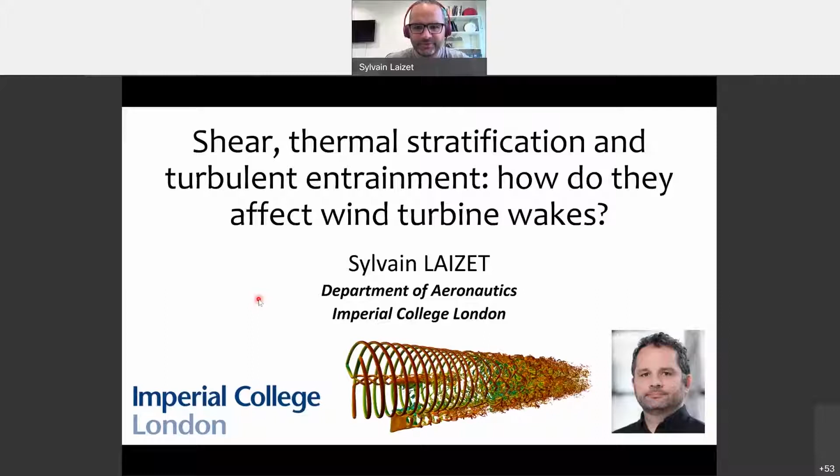I would like to thank my collaborators, Georgios Deskos from NREL, Amy Hodgkins, who is a PhD student currently working with me, and Nikos Bempedelis, who is a postdoc also working with me in the Department of Aeronautics. The results that I'm going to present today were produced by those three collaborators, so I would like to thank them deeply, and I'm very honored to present their results on their behalf.

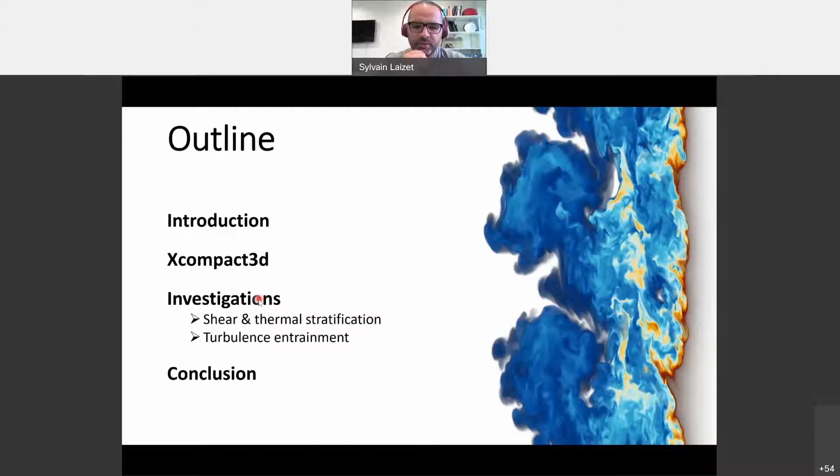So this is the outline of my presentation. I will have a small introduction - you are obviously all familiar with wind farms, so it's going to be very short. Then I will briefly introduce the wind flow solver that we are using for the simulation. And then I will focus on two aspects, shear and thermal stratification, and how they are affecting the near-field wake development of wind turbine wakes. We will also be looking at turbulence entrainment at the farm level, while the shear and thermal stratification is looking at the wake level. And then I will conclude this talk with some conclusions.

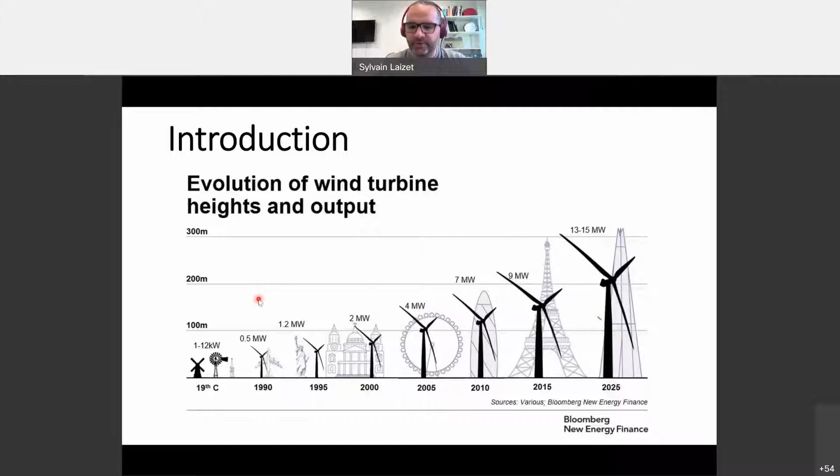There is a lot of mechanisms. There is some mixing, there is some breakdown of turbulence, there are various instabilities at stake. Due to the large size of the wind farm, we need to take into account atmospheric boundary layers, so we need to take into account shear effects, we need to take into account thermal stratification that might happen. We want to better understand the atmospheric turbulence mixing happening at the interface of the wake, the tip vortex spiral dynamics, the various instabilities that are happening, and when the wake is going to transition to turbulence. All these features have an effect on the power output of wind farms.

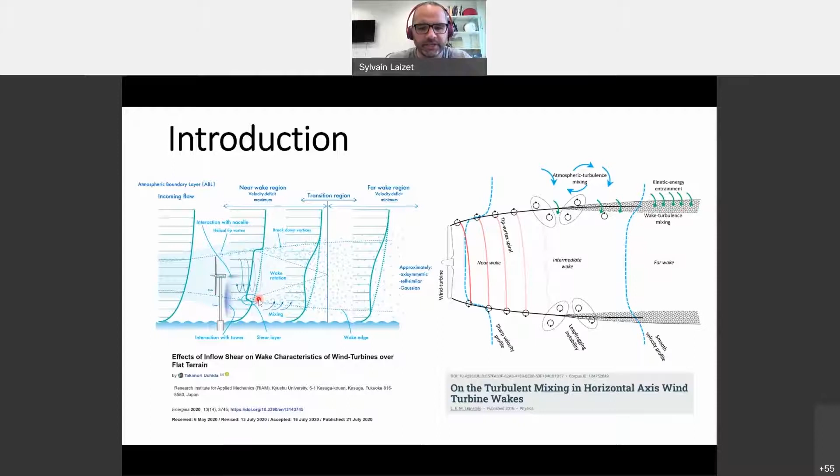So all the results that I'm going to present today have been performed with our open source wind farm simulator called XCompact3D. XCompact3D is a framework of high-order finite difference flow solvers, and as part of the XCompact3D framework, we have a wind farm simulator called WInc3D. As Flavio said in the introduction, if you're interested in using this XCompact3D framework, please register for the tutorials on Wednesday, and Flavio will be doing a demonstration on how to use XCompact3D. We have some ready-to-run simulations, so it's usually fairly straightforward to use this wind farm simulator.

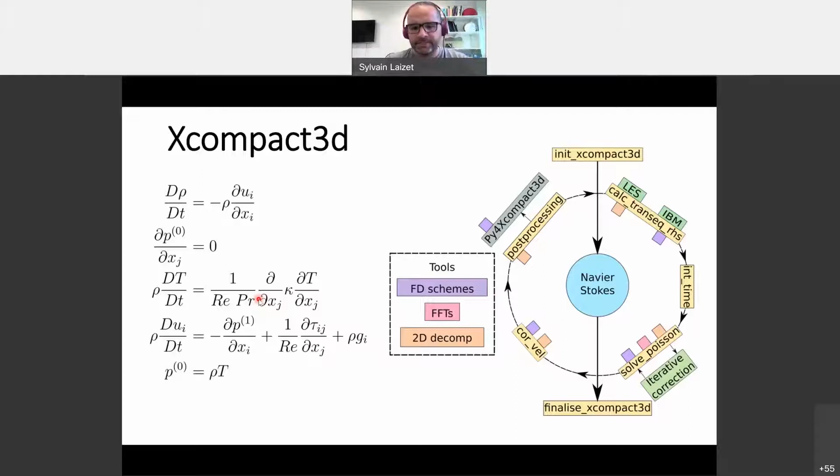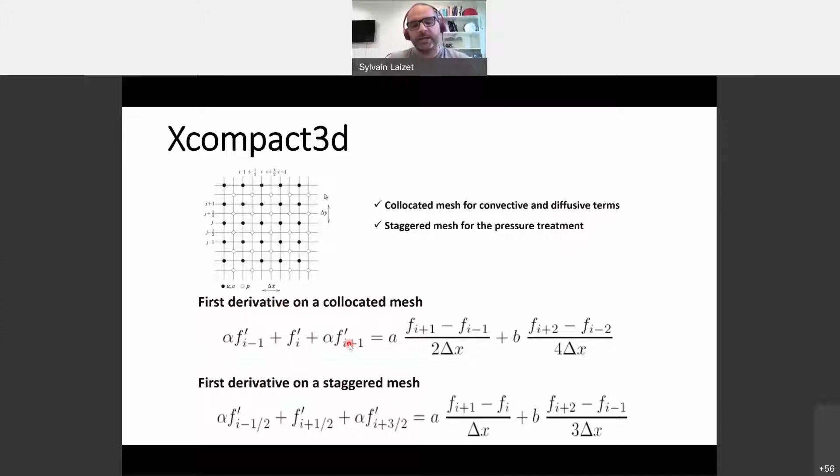In terms of equations we are solving, I'm not going to spend too much time on this - we are solving the Navier-Stokes equations. The originality of XCompact3D is that we are using a Cartesian mesh and high-order finite difference schemes. Just to give you an idea of how high-order finite difference schemes look like: the key feature here is that they are implicit in space, which means that if you want to compute the derivative at a node, you need to know the derivative at the node I-1 and I+1. The idea is that you are trying to mimic spectral methods by allowing the schemes to capture a wide range of turbulent scales.

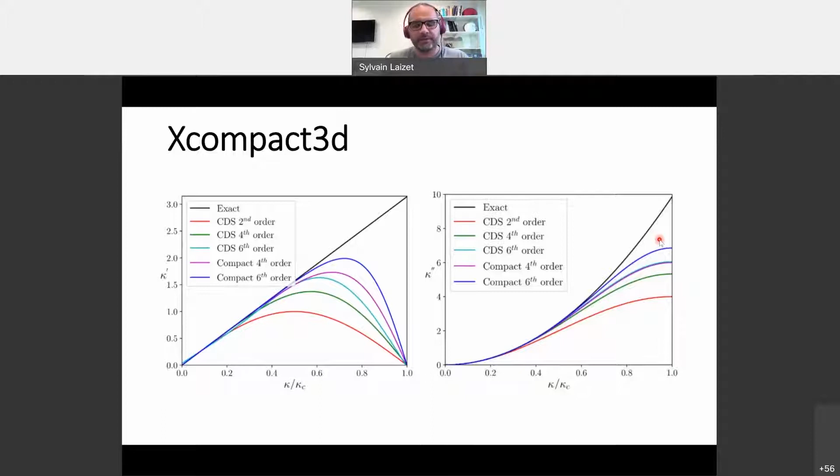The point I want to make here, and this is something now widely accepted in the community, is that high order methods are highly desirable to study turbulent flow, because at a given resolution or with a given number of degrees of freedom, you can capture more scale. So they are highly interesting with that respect.

The second important aspect of XCompact3D is that it is based on a 2D domain decomposition, which means we can efficiently use supercomputers based on CPU architecture. We are currently working on a GPU-friendly version of this XCompact3D solver, but at the moment we are only using CPUs.

All the communications, the global communication, are based on MPI all-to-all. We are doing about 70 global transpositions per time step, which means the cost of communication is between 30 and 80%. Just to give you a brief introduction to XCompact3D.

You start with a domain decomposition in X pencil. You do all your calculation in the X direction, and then you switch to the Y pencil decomposition, and you do all your calculation in the Y direction, and then you do the same thing in the Z direction, and you can switch from one domain decomposition to another.

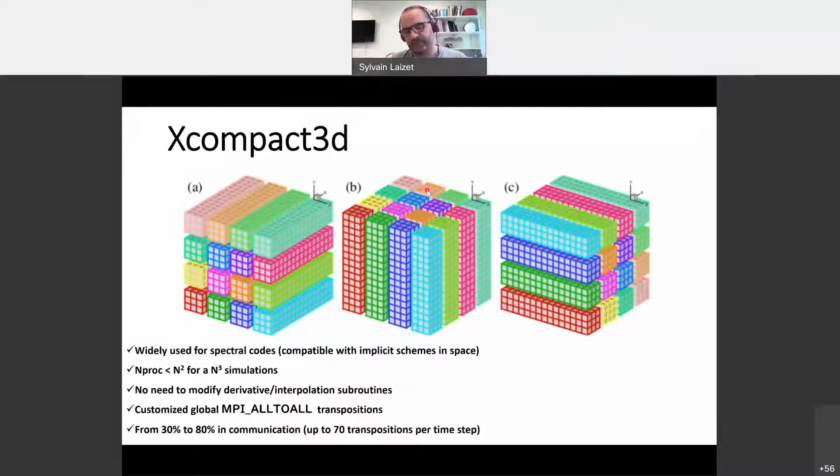This way, there is no overlap between the calculation and the communication, which means the parallel efficiency is really good. We did some benchmarking with up to 1 million cores, and you can see that if the number of mesh nodes per CPU core is large enough, typically above 50,000, then the scalability will be excellent.

If your number of mesh nodes per core is too small, then of course you will produce too many communications, and the scalability will not be that great. But once again, if you have the right balance of mesh nodes and cores, then the scalability will be excellent up to 1 million cores.

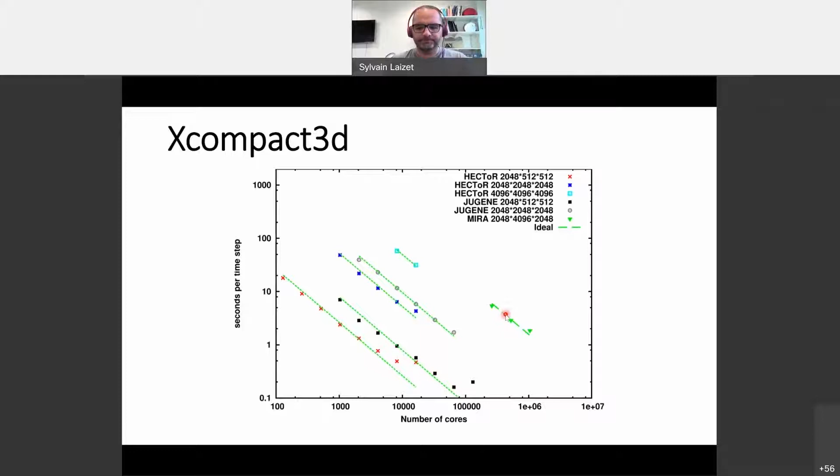Regarding simulating wind farms, we are using customized actuator line or actuator disk method. So I'm not going to spend any time on this, you are all very familiar with those techniques.

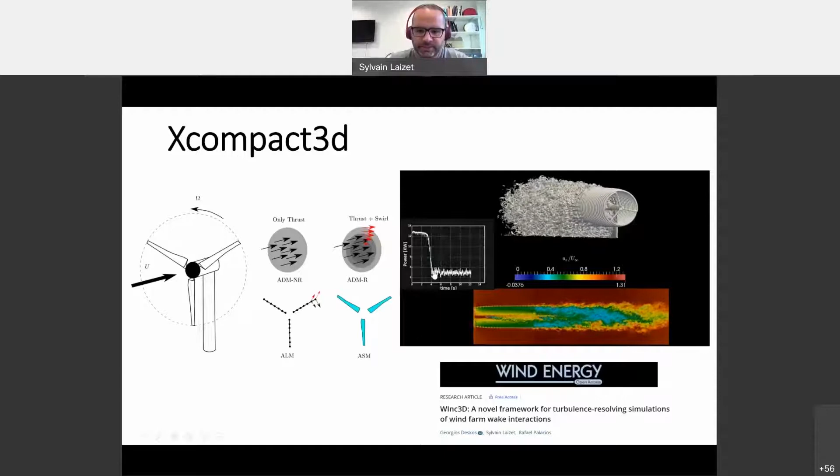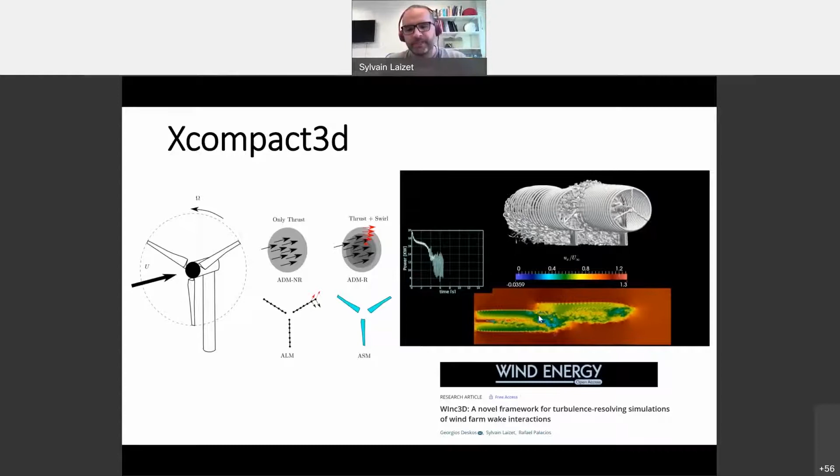Here you can see a small movie to highlight the importance of wake-to-wake interaction, where you have two wind turbines aligned. You can see there's a dramatic power reduction. Here there's a first turbine, here there's a second one. When you shift the first turbine with respect to the second one, you can see that the power output is actually not too affected.

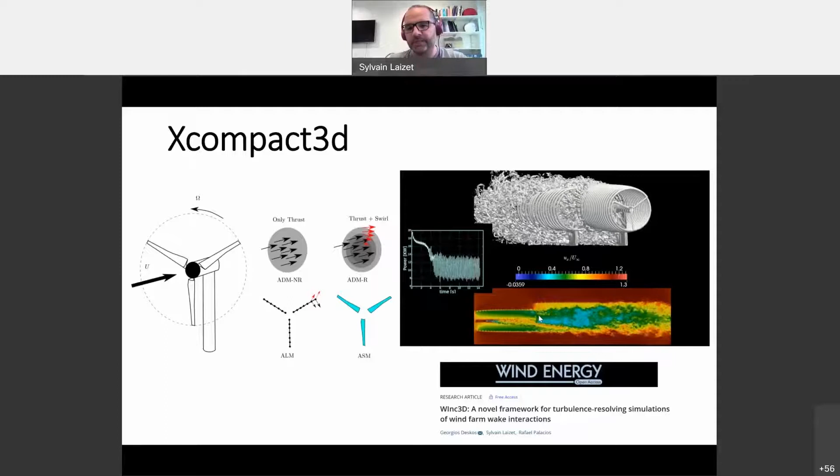This is just to highlight that XCompact3D is designed for high fidelity simulation of wind farms, and we can really try to focus on wake-to-wake interaction, and this is what I'm going to present in the following. So the first part of the results is going to focus on an idealized setup to look at the influence of shear and thermal stratification.

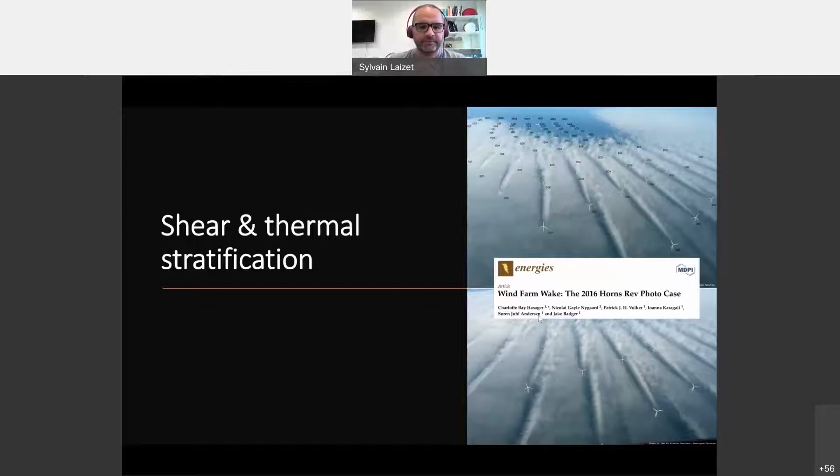So the computational domain is 10R by 10R by 10R, R being the radius of the blades. We are looking at lab scale turbines. The radius is 10.24 meters. We are using 513 cube mesh nodes. The Reynolds number is 30,000, and dx is equal to dy, dz equals 0.02 meters.

We are going to impose 3 different shear intensities in the inflow boundary condition: 0, 10, and 20%. Those values are representative of what you will get for modern large-scale wind farms in real-life applications. These are values typically encountered by large-scale turbines.

We are also looking at 3 different thermal stratifications: 0%, 1%, 2%. Once again, these values may appear small.

They are small, but this is the temperature difference you will experience in a modern wind farm, no more than 2% typically. In order to trigger turbulence, we need to impose some perturbation. Basically, if you do not impose any perturbation, because the flow solver is so accurate and conserving energy, if you start with a uniform velocity profile, then the wake will remain laminar. So it is important to add some perturbation, and we add it at the location of the turbines.

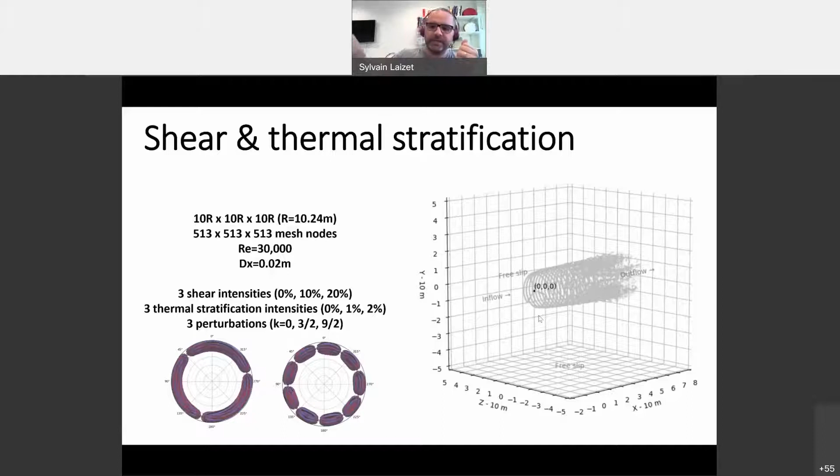I will show you more detail here. So we did the 3 by 3 by 3, we did the 27 simulations. I'm not going to present results from all 27 simulations, I'm just going to present you with a selection of results.

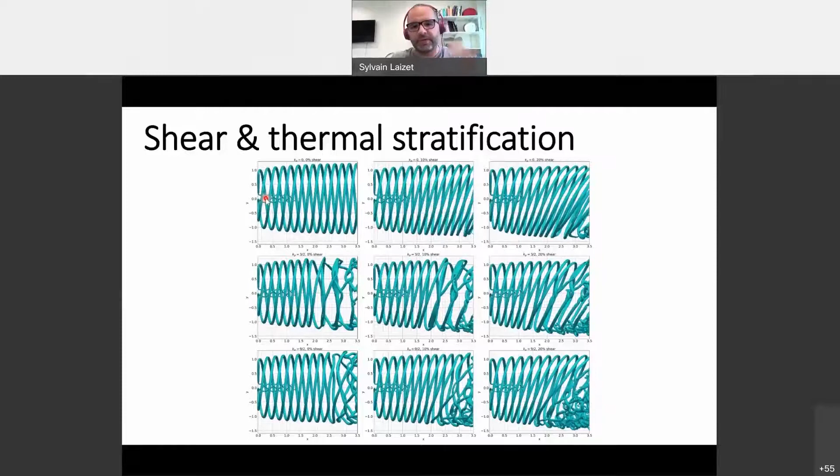But if you count the number of vortices here at the top and the number of vortices here at the bottom, they are the same. It's just that the distance between them is a bit larger. In our setup, the root vortex is not important; we have been trying to minimize the root vortex so that it does not affect our study.

So the first thing we're interested in is whether thermal stratification is going to have an effect. We know shear is certainly going to affect the breakdown to turbulence. We know that the type of perturbation and the wave number is going to have an effect as well, and this is what I'm going to discuss here.

So if we start by discussing the effect of shear and the effect of the perturbation: here we are focusing on perturbation 3/2 and 9/2, so we are discarding the zero perturbation.

We can see that 3/2 means we are going to have a pairing of vortices at 3 different locations. So you can see the imprint of the perturbation here, at the start. This is the same as this plot here, but we are plotting the vortices in a plane—a projection on the plane—so we can better see what's going on.

You can see that they start parallel, and then eventually in the transition region they start being less parallel, and then they start merging together. When we go from 3/2 to 9/2, instead of 3, we are going to have 9 different locations—1, 2, 3, 4, 5, 6, 7, 8, and 9—for the pairing. And if we look at shear, we can see that it promotes this mutual inductance instability.

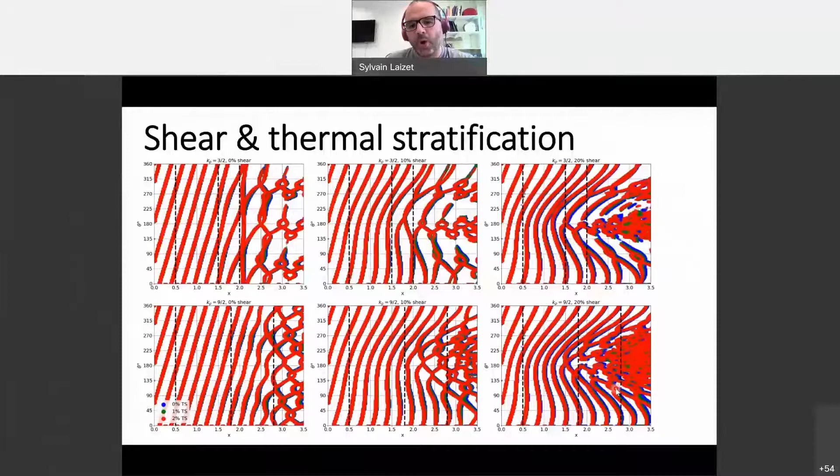So one of the first key results here is that when we are looking at the breakdown to turbulence, thermal stratification only has a very, very limited effect, while the shear is promoting the breakdown to turbulence. This is the first key message here.

We can also look at the size and the shape of the wake. So here we are looking at the 27 simulation. We are looking at the shape of the wake after 1, 2, and 3 radius, left, middle, and right, top to bottom. Top is with 0 perturbation, then 3/2 perturbation, and 9/2 perturbation at the bottom.

The key figure here is that when you have shear and thermal stratification, the wake is slightly shifted downstream. It's a little bit bigger in size, and it's mainly bigger at the bottom of the computational domain. At the top of the computational domain, there's not much change.

If we look at the area, and we are interested in the area difference with respect to the uniform case where there's no shear and no thermal stratification, you can see differences up to 16%. So when you combine shear and thermal stratification, there is a significant effect on the wake dimension.

If you only look at thermal stratification, the differences are very small—we're talking about differences of 1, 2, maybe 3%. So thermal stratification alone is not doing much. But it's very interesting to see that when you combine shear and thermal stratification, you have a dramatic effect.

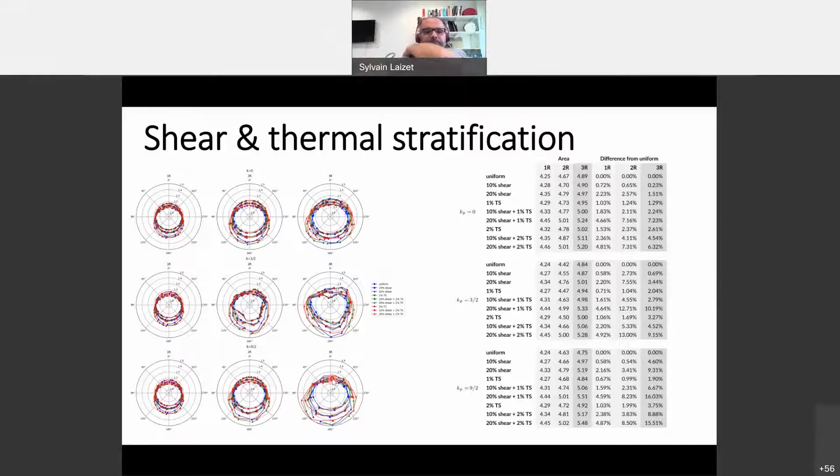We also looked at POD. I need to be conscious of time—I can see that I'm going to run out of time. So we are looking at POD modes as well, and we can see that...

Basically the flow is mainly driven by two pairs of POD modes. These are the dark blue here—this is the first pair of modes, and this is the second pair of modes. You can see that the first two pairs of modes contain more than 80% of the energy. When you add shear and thermal stratification, there is very little difference in this.

The main differences you will see is that 20% shear plus 1% thermal stratification is when you observe an earlier breakdown of turbulence. Because the wake is becoming turbulent sooner, the energy distribution among the wakes is wider, so the energy content of the first 10 pair of modes is a little smaller, but there is nothing much we can see here.

What is going to be more interesting is to do some POD, where the wake is laminar, where the wake is transitioning to turbulence, and when the wake is fully turbulent. This is how we are defining the linear, transition, and turbulent regions. Transition is when the tip vortices start to interact with each other.

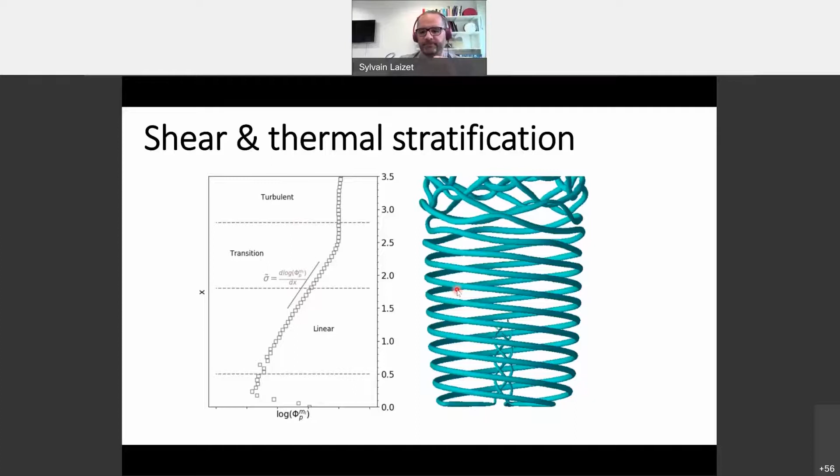We can split that, and this is a very interesting plot. On the left-hand side is the linear region, in the middle the transition, and at the end the turbulent region. You can see that the black circle corresponds to the helical spiral modes.

These are the modes related to the tip vortices. The square corresponds to the mutual inductance instability, which is triggered by the artificial perturbations that we are imposing. In the linear region, the dominant modes are the helical spiral ones, meaning that the flow and the wake is driven by these helical vortices. The perturbation is not affecting the flow.

When you switch to the transition, the dominant mode becomes the mutual inductance instability, which is the one that triggers the breakdown to turbulence. You can see that both pairs of modes, the helical spiral ones and the mutual inductance one, have more or less the same level of energy. So they are competing with each other.

One is trying to maintain the laminarity of the wake, the other is trying to transition to turbulence. And of course, when the flow is becoming turbulent, the main dominant mechanism driving the flow is the mutual inductance instability mode.

By doing this, I cannot spend too much time on this, but we are able to fully understand the different mechanisms, and more importantly, we are going to be able to see how the shear is affecting the flow.

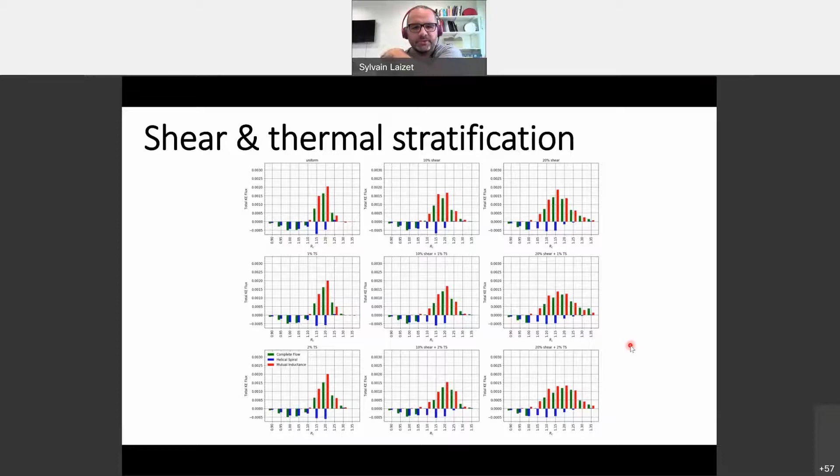Sadly, I want to be able to spend some time on the second part of the talk, so I'm going to skip this one. I think I have about 10 minutes max to talk about turbulent entrainment. This time we are going to look at a farm-level problem, looking at turbulent entrainment. There's a well-known picture of modern wind farms from the annual review by Stevens and Meneveau.

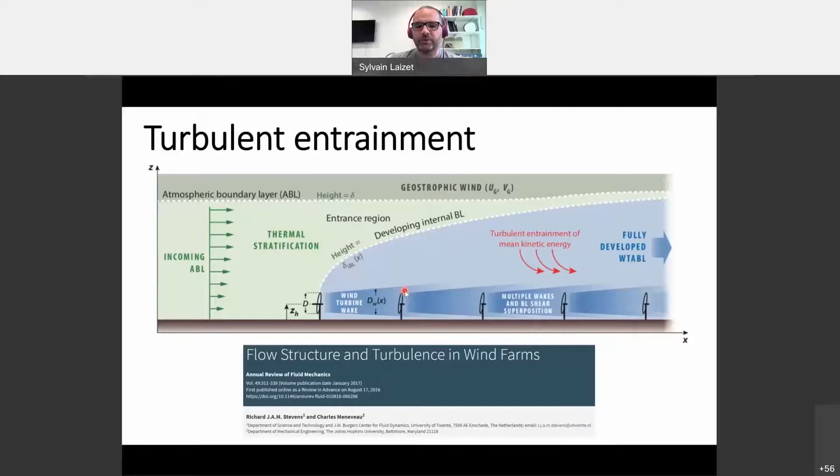This is what we are going to understand: you have the incoming atmospheric boundary layer with or without thermal stratification, then an internal boundary layer, but also turbulent entrainment of mean kinetic energy happening at the boundary between the wind turbine wake and this internal boundary layer.

So in order to do that, instead of doing a precursor simulation and then the simulation of the wind farm, we are combining the two together. These are the parameters of the simulations here.

Now we are looking at large-scale wind farms in real life. We are going to look at three different configurations: fully aligned configuration with 26 rows, fully staggered configuration, and half staggered configuration.

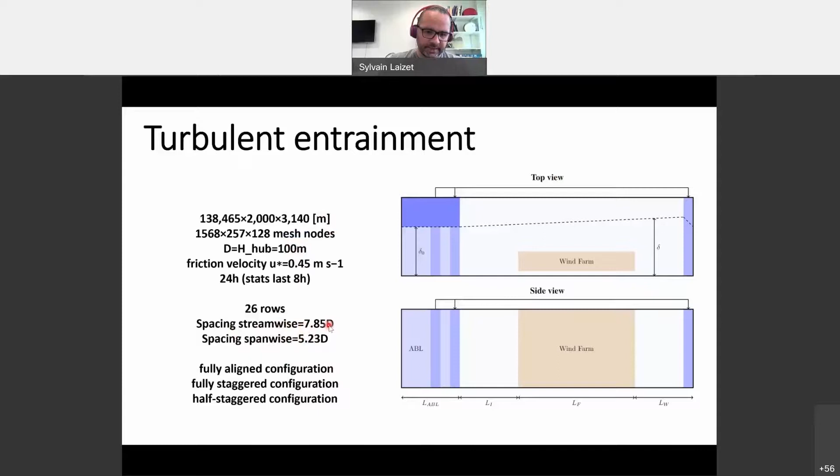The streamwise spacing is 7.85 diameters, and the diameter is 100 meters. The spanwise spacing is 5 diameters. So the streamwise distance is roughly 785 meters. When you look at those figures, the axis is in meters, but don't be surprised by the distance and dimension.

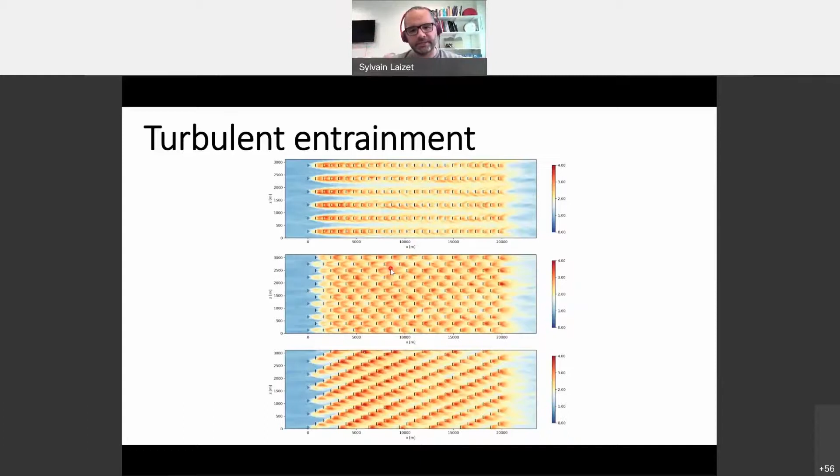We are looking at a very large scale wind farm. In the previous study, we were using the actuator line model. In this study, we are using the actuator disk model.

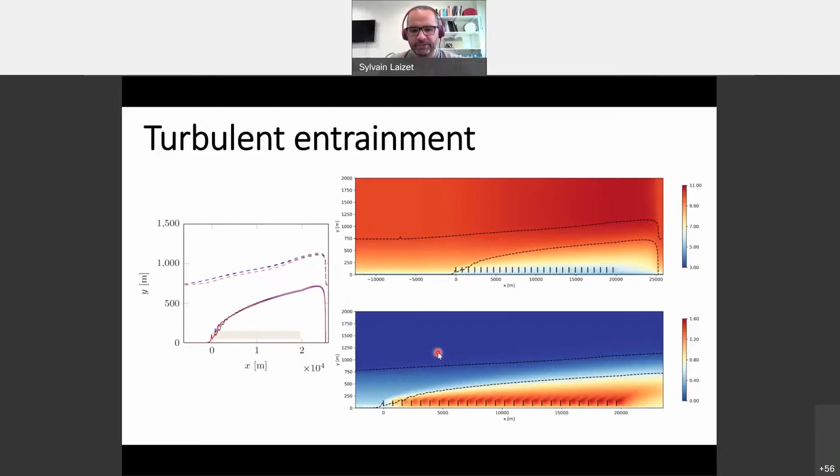What we are interested in is this entrainment parameter. There was a study by Luzzatto-Fegiz and Caulfield in 2018, where they worked out a formula for the power density of a large-scale wind farm. In this formula there are many parameters, but the one we are interested in is this entrainment parameter, and also the CM coefficient, which in that study was assumed to be proportional to e to the 4.

This entrainment parameter is often assumed to be constant, about 0.1. You can see that this entrainment coefficient is going to affect the power density of the wind farm, so it's very important to study this.

We can see there is an effect of the arrangement of the farm. This is the entrainment interface for the fully aligned, fully staggered, and half staggered cases. You can see that when you switch from one to another, the power output and the entrainment coefficient are affected by the spatial arrangement of the turbines — we suspected that, but now we have confirmation.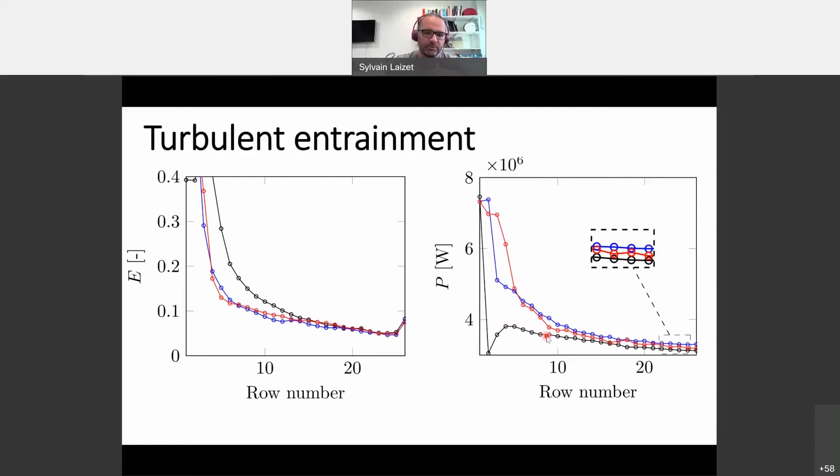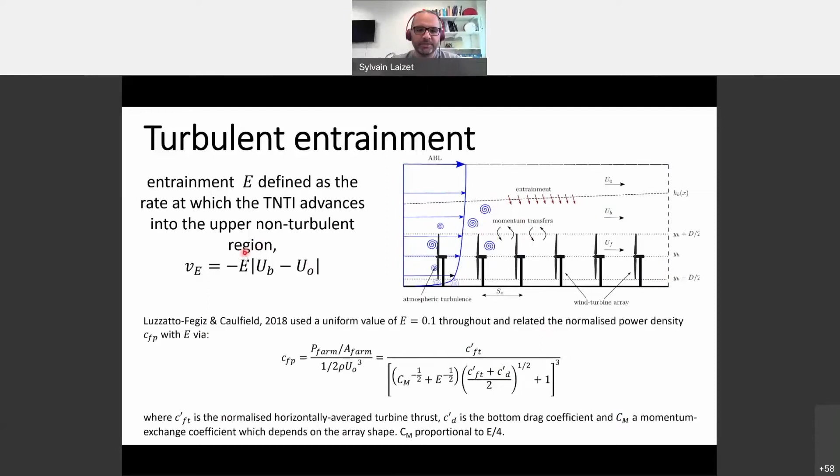This is ongoing work, and we are still trying to make sense of all this data. We are very much looking at entrainment and momentum transfer, trying to understand how this turbulent entrainment behaves when you change the spatial arrangement of the turbines, and also we need to look at what happens when you vary the turbulence intensity of the incoming atmospheric boundary layer, and so on.